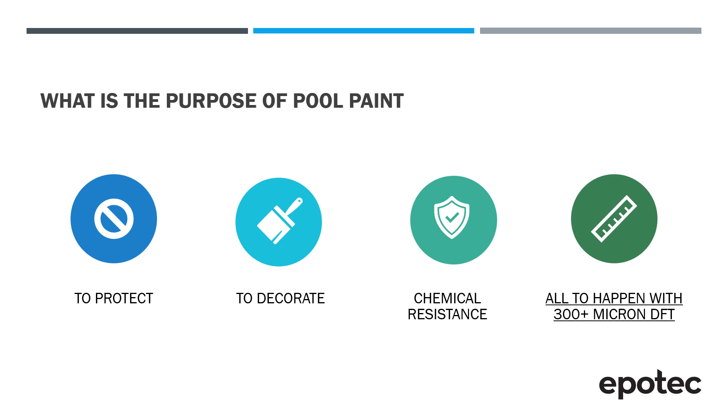EPOTEC HB was introduced as a pool paint way back in the early 1990s and had been used extensively in residential swimming pools, leisure centres and council facilities in New Zealand. EPOTEC NT was developed over many years and introduced to the market in 2017. It overcomes many of the problems common with old high-build solvent epoxy systems. NT has a hard-wearing, tile-like finish and is easy to clean. That's why it has become a favourite with commercial pool operators, councils and swim schools throughout New Zealand, Australia, Southeast Asia, the Pacific Islands and now the USA.

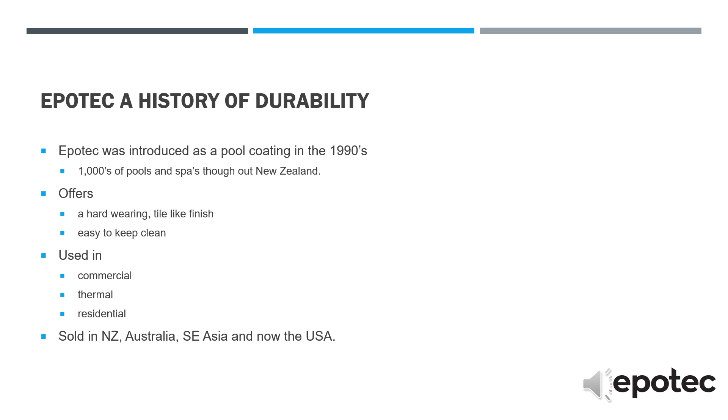Pot life is the time left after mixing to use resin. Pot life is shorter when hot and longer when cold. Bigger mixes have shorter pot life than small mixes.

An epoxy's open time and overall cure time govern much of the activity of building and repairing with epoxy, and hardener selection is crucial to determining open time and cure time. Open or gel time dictates the number of minutes available for mixing, application, smoothing, shaping, assembly, and clamping. Epoxy cure time dictates how long you must wait before removing clamps, or before you can sand or go on to the next step in your project.

Two factors determine an epoxy mixture's open time and overall cure time: hardener cure speed and epoxy temperature. Epoxy cures faster in warmer temperatures and in thicker applications. Epoxy cures slower in cooler temperatures and in thinner applications.

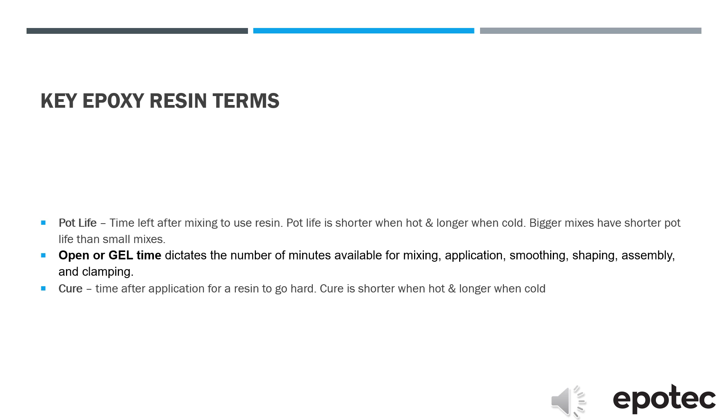Recoat time is the time after cure when resin can be recoated. Recoat time is shorter when hot and longer when cold. If the recoat window is exceeded, sanding between coats is required or delamination can occur.

Cure time is the estimated time after application for a resin to go hard. Cure is shorter when hot and longer when cold.

Exothermic reaction is the heat released by the chemical reaction between resin and hardener that cures epoxy. The amount of heat produced depends on the thickness or exposed surface area of mixed epoxy. In a thicker mass, more heat is retained, causing a faster reaction and even more heat. The mixing container's shape and the mixed quantity have a great effect on this exothermic reaction.

A contained mass of curing epoxy, 8 fluid ounces or more, in a plastic mixing cup can quickly generate enough heat to melt the cup and burn your skin. However, if the same quantity is spread into a thin layer, exothermic heat is dissipated and the epoxy's cure time is determined by the ambient temperature. The thinner the layer of curing epoxy, the less it is affected by exothermic heat and the slower it cures.

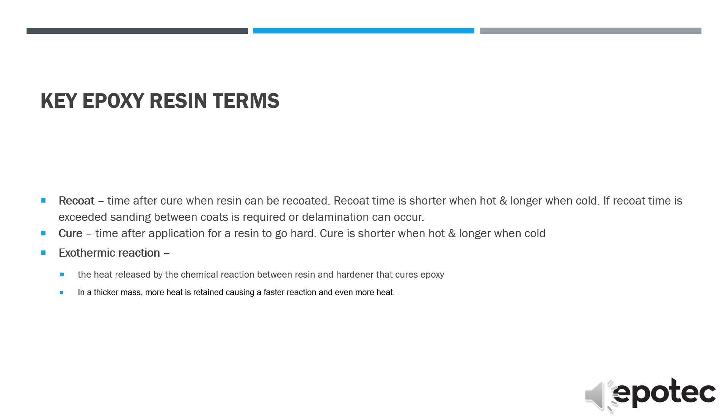When painting pools with bare or exposed concrete surfaces, it is critical, after correct preparation of the surface, to seal the substrate before applying your specified topcoat.

Concrete WB Epoxy Sealer is a 2K water-based sealer developed for immersion use. It binds and penetrates the substrate and provides the bridge to EPOTEC NT or Aqua 1K topcoats.

The benefits of using Concrete WB Epoxy Sealer are: easy to mix and apply, easy clean-up, fast cure, low odor, and it can be applied to damp substrates with the bonus of being vapor permeable.

Please note it must be overcoated within 5 days of application. There is a visible end to pot life indicated by rapid increase of viscosity. Like all WB epoxies, cold humid conditions will slow cure, drying time, and recoat time.

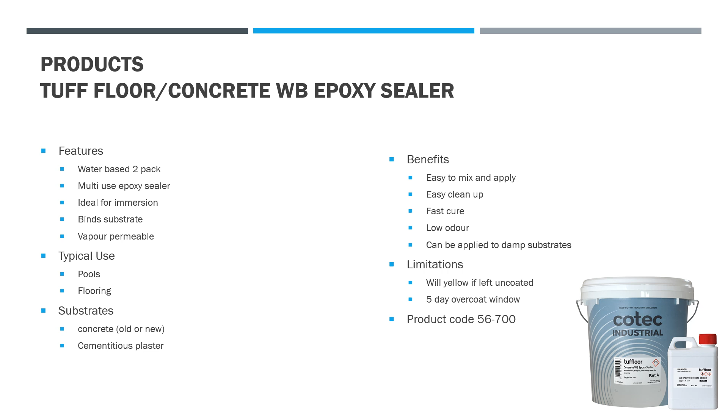Primer KC is a 2K epoxy primer used to promote adhesion and bond strength to cement-based substrates. It is a filled epoxy primer and offers excellent leveling properties to cementitious surfaces that have been exposed to the elements and are porous. It has excellent moisture tolerance, adhesion, and provides an excellent base layer for EPOTEC NT.

Primer KC can also have sand added to provide a self-leveling base layer, or can be thickened with silica flour to become a trowelable fairing primer for unpainted pool walls.

Primer KC is solvent-free and easy to mix. It can be poured out and squeegeed and backrolled for rapid application to floors, and rolled directly to walls. Being solvent-free, Primer KC is low odor.

Please note it must be overcoated within 5 days of application. There is a visible end to pot life indicated by rapid increase of viscosity. Like all epoxies, cold humid conditions will slow cure, drying time, and recoat time. As soon as it is tack-free and foot trafficable, it is suitable for overcoating.

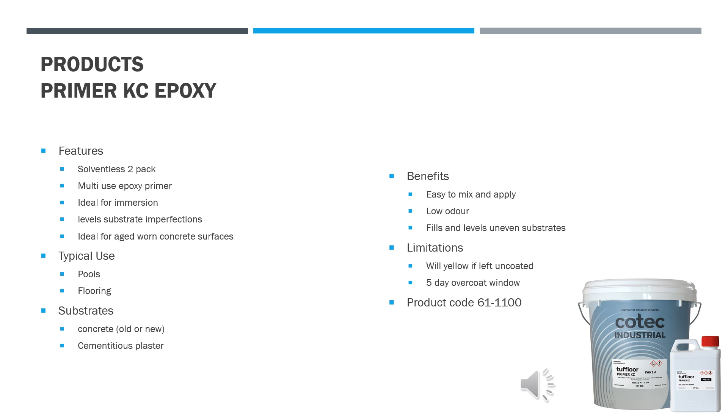Gemrez LV 2:1 is a low viscosity resin system that has a multitude of uses. It is 100% solids and solvent-free.

As a primer, it will prevent the transmission of moisture vapor from the surface. It is well suited as a primer to bind aged or deteriorating concrete surfaces, as it is as a coving, topping, or screeding resin. It can also be mixed with high levels of aggregate fillers to create screed or coving.

It exhibits good pot life when mixed with quartz aggregate such as J61W, but with rapid hardness development. It has excellent tolerance to damp surfaces and can cure down to 5 degrees Celsius.

Used in conjunction with EPOTEC NT in a variety of application modes, Gemrez LV provides a high-quality, moisture-tolerant primer. As a coving resin, it provides a highly workable product.

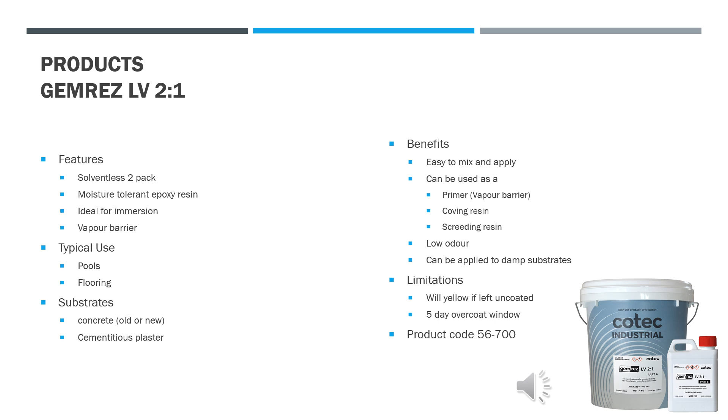Hydro Epoxy is our priming solution for pools with hydrostatic pressure or damp surfaces. Hydro Epoxy is hydrostatic pressure tested, exceeding 45 psi or 310 kPa.

It is also negative hydrostatic pressure tested and water vapor transmission rate tested. TDS details the testing data.

Not only can Hydro Epoxy be used as a primer, it can also be applied as a protective laminate system, applied in situ with fiberglass to provide a smooth, jointless system which follows the substrate contours, profiles, etc. The in situ fiberglass laminate system is impact resistant and provides a waterproof surface.

It forms a continuous membrane which is fully bonded to the substrate. Often you see this type of system installed in old concrete pools that are prone to movement and leaking.

Hydro-Epoxy laminate installation is technical in its nature and is only specified with approved installers. Hydro-Epoxy can be overcoated with a variety of other EPOTEC resin systems and top coats.

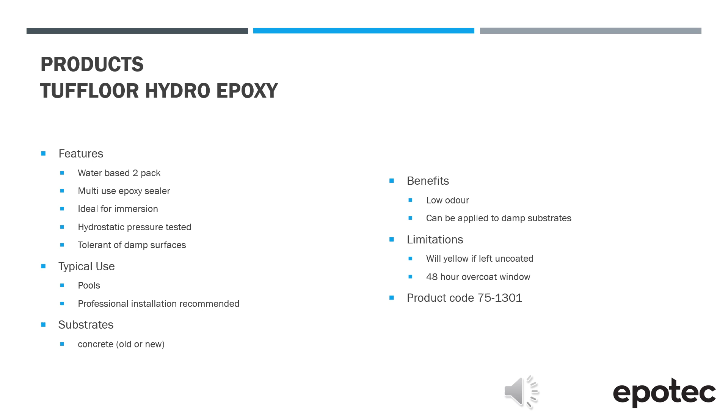Aqua 1K is designed mainly for recoating chlorinated rubber pools, or when use of an epoxy is not practicable. Aqua 1K does not have the same surface durability as EPOTEC NT. We recommend EPOTEC NT for all commercial and institutional installations.

Test existing coating prior to applying Aqua 1K. See the information sheet on identifying pool coating type on the EPOTEC website. Preparation of the existing coating surface is critical. Be sure to check the EPOTEC spec tool for suitable preparation.

Aqua 1K is available in all EPOTEC NT colors. All colors are available from EPOTEC's T3 software. Cobalt tinter is also available to add to your EPOTEC carousel for use in Aqua 1K. It enhances film and color retention properties of Aqua 1K.

For hard-wearing pool paint, use EPOTEC NT epoxy. If it is an existing chlorinated rubber or acrylic coating, it will need to be fully removed if moving to an epoxy system. As always, allow to cure for a minimum of 7 days before filling the pool.

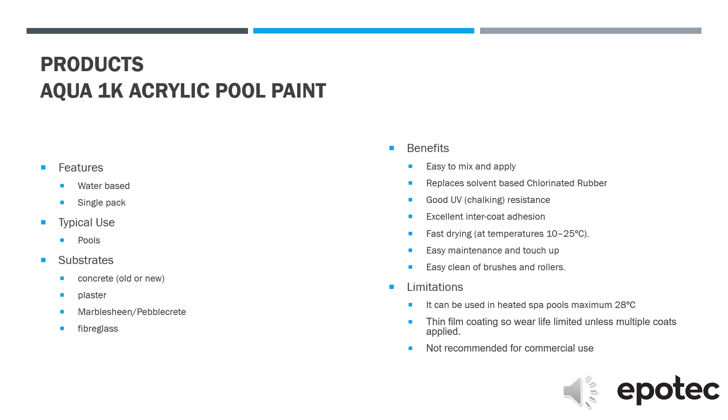Now we turn to EPOTEC NT. NT provides enhanced, reliable technology. It is a 100% solids epoxy, meaning it is solventless, unlike most of its competitors that contain solvents.

100% solids means the wet paint film you put on is what you get. There are virtually no solvents to evaporate from the wet paint as it dries and leave a diminished coating. Applied correctly, NT provides an exceptionally durable coating.

NT has enhanced UV stability. It is hard-wearing and can provide a tile-like finish over a well-prepared surface.

EPOTEC NT's faster positive cure hardener means no waiting for the hardener to get ready after mixing. Once you've finished mixing, the reaction will start and continue almost unaffected. All that will really affect it to a significant degree would be if the temperature goes down dramatically, meaning near 0 degrees. Our positive cure technology will cure at less than 0, but the cure time slows dramatically. We do not recommend application below 13 degrees Celsius to maintain next-day recoat.

This has implication on the recoat and/or refill time for the pool after painting. Our epoxy resin chemistry is very robust, and with the recent evolution in the type of hardener technology, NT provides a noticeable enhancement over competitive offers.

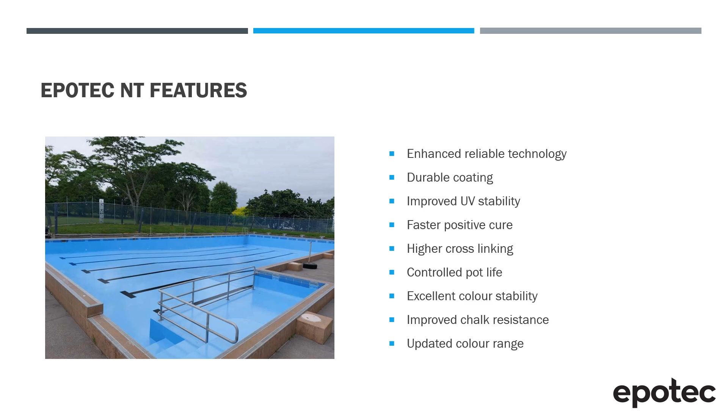EPOTEC NT comes in a 5 kg kit. The mix is made inside the large can, the Part A. It's important all the contents of Part A are smooth prior to gradually adding all the content of the hardener, Part B. Drill mixing is recommended for 3 to 5 minutes, taking care not to aerate the mix.

Because EPOTEC NT is 100% solids, air bubbles entrapped by over-vigorous mixing will escape from the film slowly during the curing process and may become evident in the paint surface as bubbles, particularly in hot conditions. So smooth and steady is good.

If mixing of smaller amounts is required, it is critical the product is weighed and mixed proportionately, maintaining the mix ratio of 4 to 1 by weight. Use scales and don't estimate by eye. Please note the batch numbers prior to use.

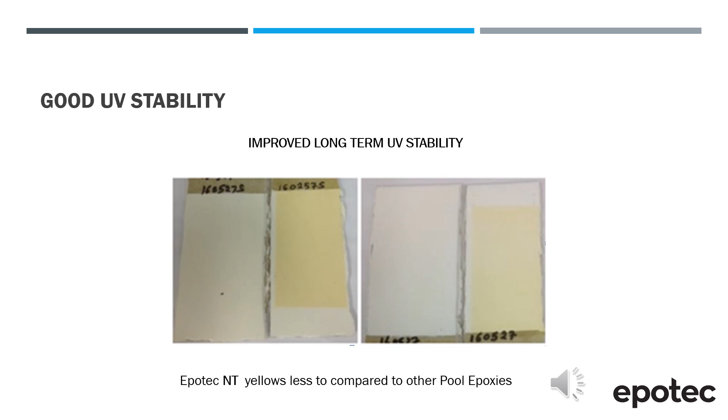We test the epoxy also for chlorine stability. Generally in pools you will find that the chlorine levels tend to go between 0 and 5 ppm, parts per million. It's rare for chlorine levels to be held at any length of time much more than that.

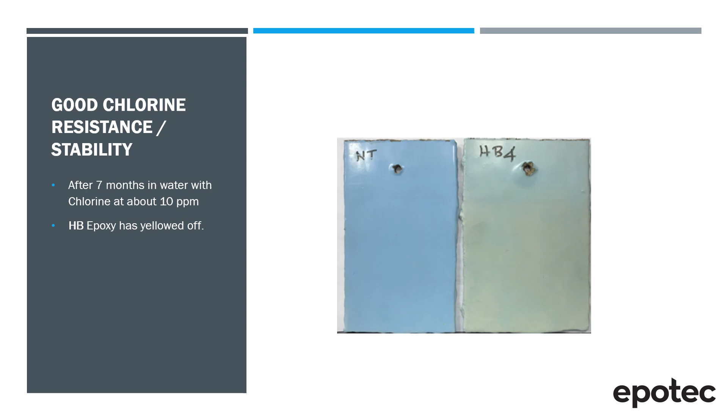Pot life. We can't stress this enough with 2-pack products. Pot life management is crucial. If you are not familiar with 2-pack products, this means the product has to be used within a specific time frame of mixing. After Part B is added to Part A, you have a defined period to apply the product before it becomes unworkable, meaning it will either be difficult or near impossible to apply. When we say there's a workable pot life, we mean that you must work within the usable pot life time frame.

EPOTEC NT has a very distinctive end to its working time and rapidly thickens and becomes difficult to work with. At this stage, product should not be applied. Leave it to cure in the can and dispose of it responsibly.

Tip: when mixing the products, it's a good idea to write down the time of mixing, the temperature, and humidity. A good idea is writing this down on some masking tape if you aren't running a job QC sheet, and sticking it to the mixed product on the side of the can. Check your smartphone for approximate temperature and humidity at the time of mixing. If you don't have a surface thermometer or humidity gauge, snap a screenshot to record it.

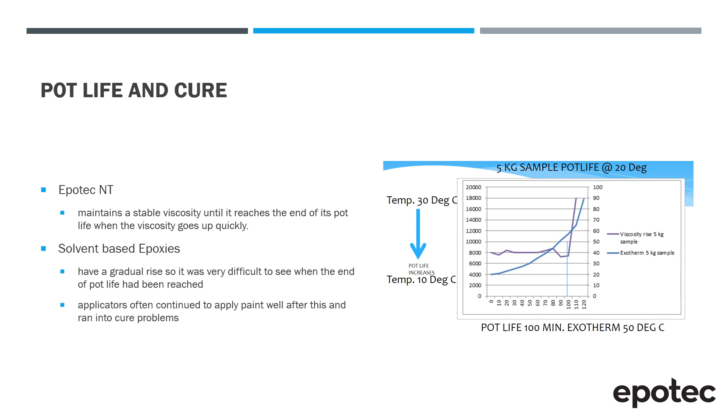Obviously, the warmer the temperature, then the sooner you will reach the end of pot life. After mixing EPOTEC NT, it runs at a stable viscosity right until it reaches the end of its pot life. Then it will thicken up very quickly. This will happen between 45 and 90 minutes depending on conditions.

Measuring surface and air temperature will assist in understanding expected pot life. The benefit with NT over solvent-based epoxy pool paints is you know the minute the paint in the tray starts to thicken up, it's time to stop using it. Dispose of it responsibly once cured hard.

In elevated summer temperatures over 25 degrees Celsius, we recommend the use of summer hardener. It is available to slow the cure profile and help overcome outgassing and bubbles often encountered in hot, windy conditions. Apply NT early as practical in summer days. Once the dew has dissipated and light is good, commence application. Avoid working in direct sunlight if possible. This also extends the cure time available for the coating and provides better surface tolerance to water in the event of unexpected rain.

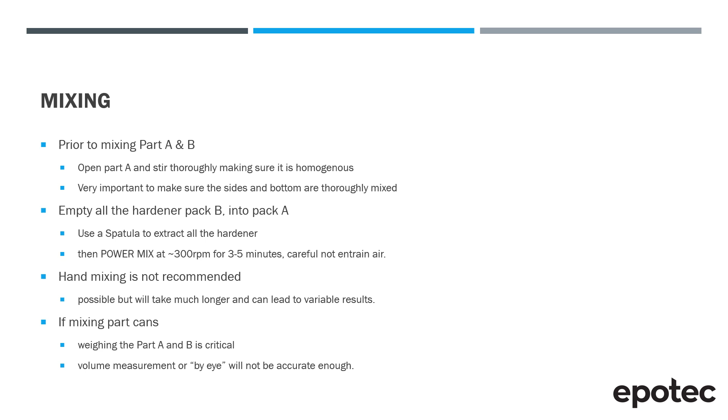Application guide for NT. EPOTEC has no induction time, so get it into the roller tray or ribbon out onto the job quickly. Use only epoxy-grade synthetic rollers. Worcester produce 10mm nap sleeves for fiberglass or very smooth surfaces, and 12 to 13mm nap sleeves for concrete and plaster.

Load rollers and apply until the roller gets sticky. The sound indicates that it is time to reload the roller. Watch your pot life and do not exceed the specified working time, as this can lead to variable results. If you are mixing smaller quantities, have some electronic kitchen scales and clean containers ready.

To sum up, we have discussed the benefits of solvent-less epoxy technology for the applicator and pool owner. EPOTEC NT provides the latest technology that, if applied to a well-prepared surface correctly, will give a long-lasting, highly durable, chemical-resistant finish. EPOTEC NT is suitable for use on fiberglass, plaster, concrete, pebblecrete, marble plaster, and dincel substrates.

The most important thing you can do is make sure the correct specification is given prior to the job being started. This will cover the preparation and application detail. EPOTEC has developed a range of primers suitable for most pool surfaces. Visit our website to load your specifications. They will be available for your ongoing reference.